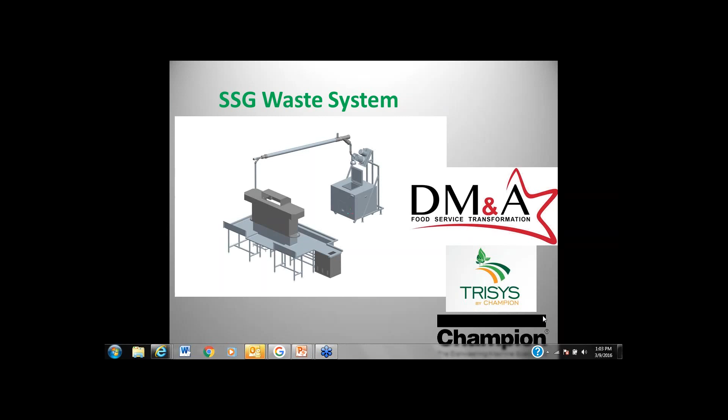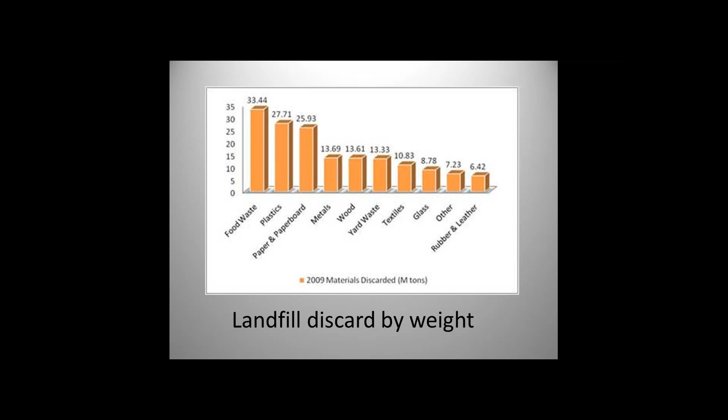Food waste, if you don't know, is the number one generated waste going into landfills today. In 1995, 14 million tons were generated, with only 3.5% recycled. As recent as 2010, that's doubled, and less of that product has been recycled. If you look at landfill discard by weight, food waste is the number one product going into our landfills today. Plastics, paper, metal, yard waste, those fill in the rest.

If you were to take all the food waste generated in the U.S. on a daily basis, it would fill the Rose Bowl to the brim. That's a lot of waste going into our landfills each day. All that waste has to be hauled off and processed, and it's a high cost to your operations. It's become a high priority in municipalities across the country as well as certain states.

Massachusetts in 2014 banned commercial operations from putting food waste into landfills, and the law basically states if you generate a ton of food waste or more per week, you have to repurpose that waste either through donations as usable food, or it can be composted or sent to biogas, but it has to be diverted away from landfill. Other states that come on board with similar legislation are Vermont, Oregon, Connecticut, Washington, and California.

The California initiative just started this year and will start next month in April with an initial 15% reduction mandate, and that will grow every year until we have a total elimination of that tonnage into the landfills in California.

Hey, Tom. Yes. You know, it's an interesting topic we have today. That's why we're doing it, because of the pressing need in America between water reduction issues with droughts and the impact that the waste has in our community, and we're all trying to be green. Now, I kind of wonder, many of our friends and clients out there have initiatives at their hospitals to address the green initiatives, and green certainly would be part of the food waste process. I hope we'll have some ideas later on to discuss about how to help these organizations achieve these goals.

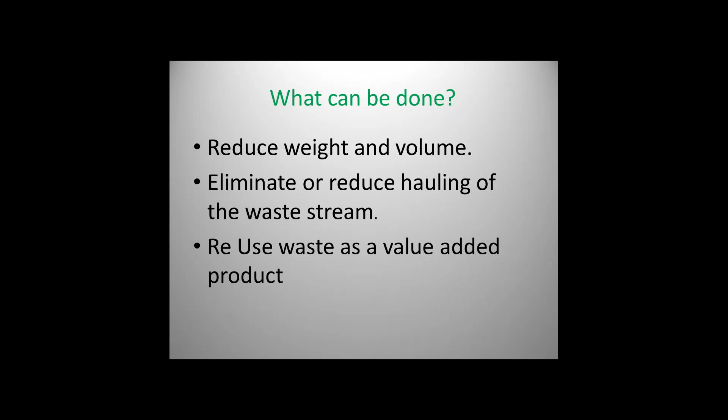Moving forward, the things we can do are first reduce the weight and volume of the waste going out. If you can eliminate or reduce the hauling of the waste stream, that saves your operation money. Or we can reuse the waste and produce value-added products for the market.

Here's a brief overview of something going on in St. Louis. Again, if your audio doesn't come through, work with me and I'll recap it at the end.

More companies are trying to go green, and that includes food recycling. The idea is to keep as much food as possible out of landfills, and this will show you how it works. The program accommodates businesses that prepare, serve, sell, and manufacture food.

For this story, we're starting in one of the cafeterias at Washington University. For years, we've been told to clean your plate, but even if we do, there's typically something like a banana peel left behind. At this location, you see about 8,000 people a day, so imagine the eggshells and other waste that has to be discarded. The good news is that no longer goes into a landfill.

It's garbled on my end as well, and I've got a few folks dropping questions saying they're also having garbled audio. Why don't you just walk us through what we're seeing, and we'll turn the volume down.

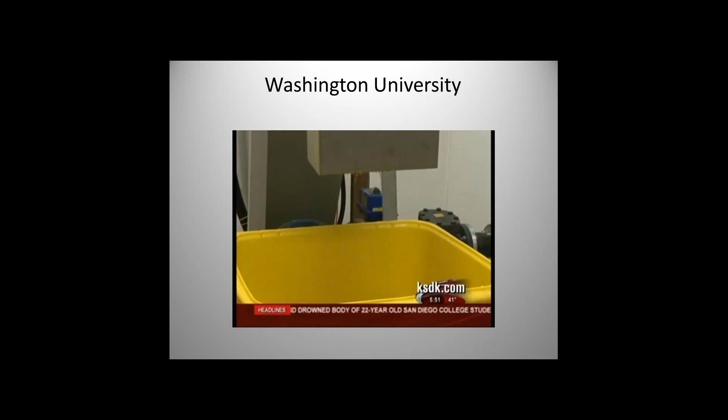So what we're seeing here is the dish room where they're processing food waste through a pulper. Then this food waste is being hauled off to the St. Louis composting facility.

It goes to the facility in wet form, and they immediately turn it into compost, forming windrows. About six weeks later, that food waste is turned directly into compost.

Washington University then takes that compost back from this composting facility and uses it on their grounds for landscaping operations. So they're taking product that would normally go to the landfill and bringing it back full circle, kind of like a farm-to-table, table-to-farm application.

That's really the nuts and bolts of what's going on here. Many of your municipalities will have composting facilities out there, and if you have that resource, this is a good way to use your food waste instead of landfilling it.

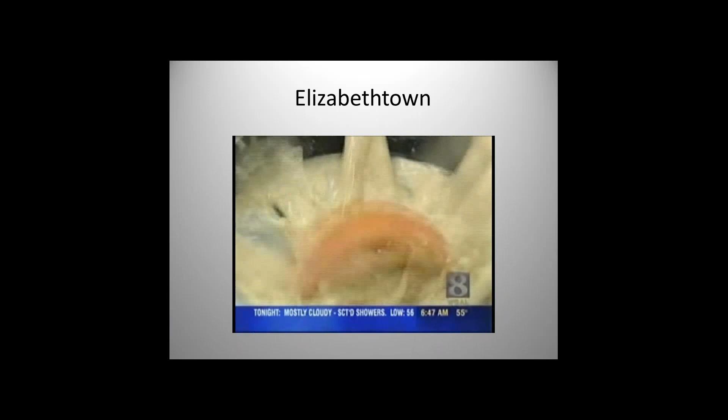Tom, what about the water? They're taking the food out of the mix, but are they reusing the water? Yeah, that water gets very milky and dirty—it's concentrated with food particles and fats, oils, and grease. They keep a closed loop on this, so that water fills into a tank and isn't sewered. It's collected at the end of each day into barrels, and those barrels are also added to the mix at the biogas plant.

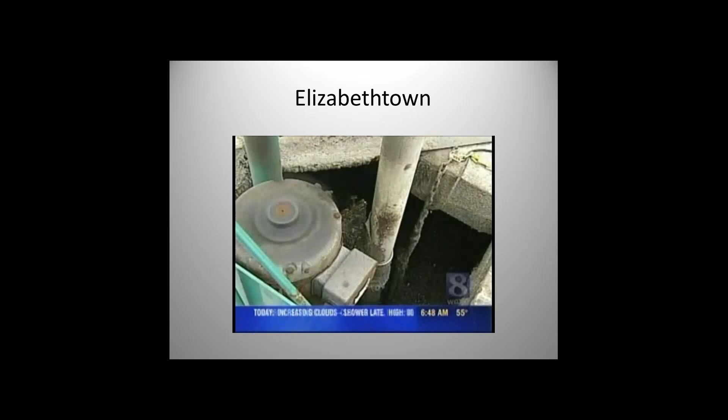That's pretty typical of what you see. Biogas plants are the big digesters that produce methane. The methane's burned off into electric generators, so it's a win-win for all people involved here.

But what do we do right now? What are our options with food waste? Well, obviously we can do the simple thing and throw it in the trash. Disposers are out there, but certain municipalities and areas of the country are having issues with disposers, mostly due to water use. Disposers can use anywhere from 7 to 14 gallons of fresh water a minute. Collectors are a means of keeping food waste out of the sewer lines, but they still use a fair amount of water.

So we're going to move forward with the latest, greatest product offering out there, and that's our slow-speed grinding system. I'm focusing on the pulper as its most current counterpart, in that we've been doing pulping for a long time and there are some benefits to it. We grind up the waste and reduce the volume by about 85%. We can take the water content out by about 20%. We recycle trough water, and it can handle all kinds of waste material.

They can be standalone, or they can be remoted where it separates the solids from the water at a remote location. They use less water than things like disposers and collectors, down to anywhere from 2 to 4 gallons a minute, so they can use a lot less water.

But if you talk to people who own them, we get feedback a lot that they're very loud. They have a high amount of wear and tear and maintenance required. They're expensive to install when you do remote locations. Very high maintenance level, heavy cleaning is necessary to keep them from stinking up the operation. You've got to manage waste odor by adding chemical. The KWs, because of the high-speed motors, tend to use a lot of energy as well.

And if you're not going to digest, you concentrate a lot of that food soil in the recycled water, and some municipalities don't like that. So what could we do?

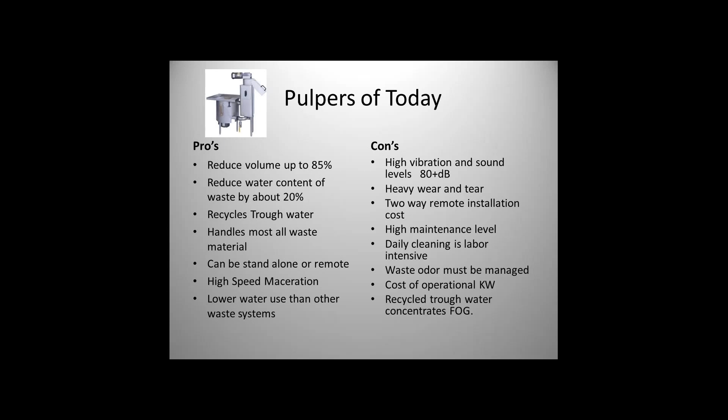Well, we come up with a product that reduces the noise level by 70%. We reduce the installation cost by about 75%. It's no extra footprint, lower maintenance item. It'll produce or process the same volumes that we have in traditional pulpers. The water use can be equal to or better, which I'll explain shortly. They're easy to clean, you don't have any odor, and we can take more water weight out of the end product.

Again, it sounds too good to be true. We're dropping power requirements by 60%, and we're using tested, reliable technology. This is just a repurposing of technology that's been out in the market for 40+ years.

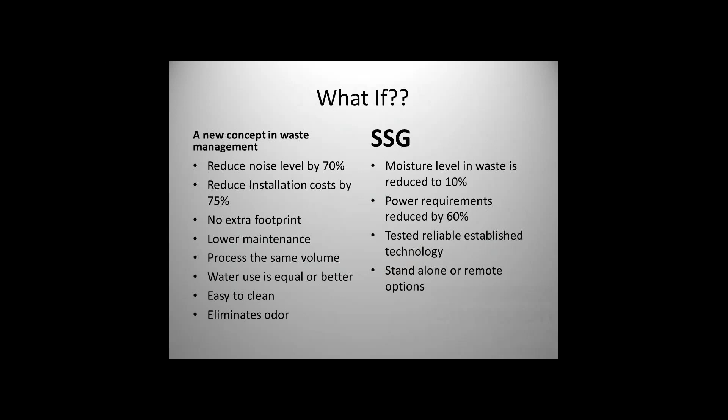So what we have is our slow-speed grinding, and what you see here illustrated is a remote system. What does it do? We have a slow-speed grinder, which grinds up the food waste, similar to that of pulping. And then we also have a slurry tank and a transfer pump that takes that slurry of wastewater and food over to a centrifuge. That centrifuge spins out the water from the solids, and then it drops the solids into whatever vessel we choose. In this case, we're going to drop the solids into a food waste dehydrator.

But that food waste could go directly into just a simple composting bin. It could go directly, if you had to, into a waste container, remoted. We could put it into a digester. There's certain commercial digesters on the market too that you can digest on site. So you have a lot of options of what you do with it at the end.

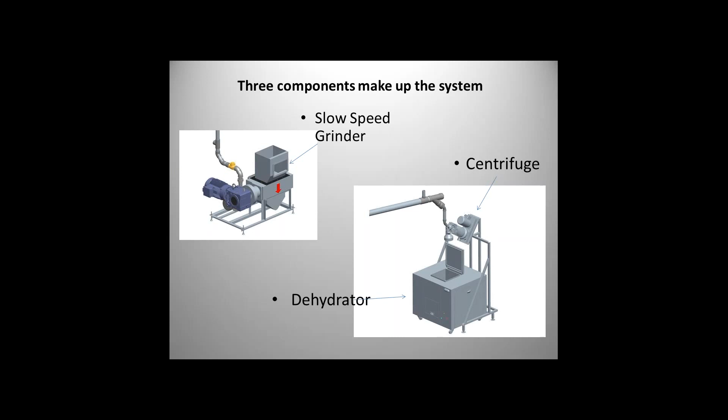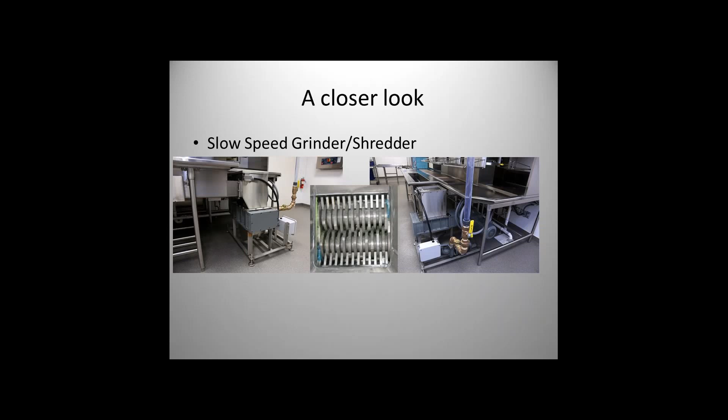This is what the shredder grinder looks like from the top. If you can kind of compare it to a paper shredder on steroids, that's what it does. It'll grind about anything you put into it. I haven't seen it not handle anything. So you've got to know if it's going to go in, it's going to get cut up. This is kind of, again, a picture of what an actual grinder looks like.

And then the next slide I'm going to show you, and the reason I show you this slide is to show you the capabilities of this grinder. What you're going to see here is a larger version in size, but it's the same mechanism that we use on our food one. It's just because we're using food, we don't use as wide as a unit.

If I can get this to play right. Excuse me, I'm trying to turn the volume down. Yeah, volume is not necessary. It's plain, clearly to the eye, you see what's going on. Clearly something for the eyes to see.

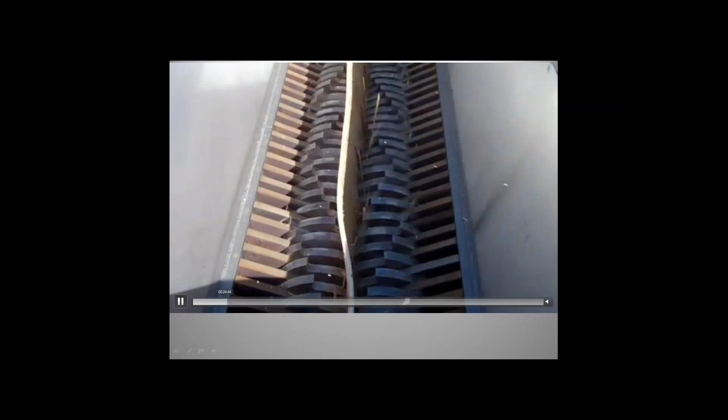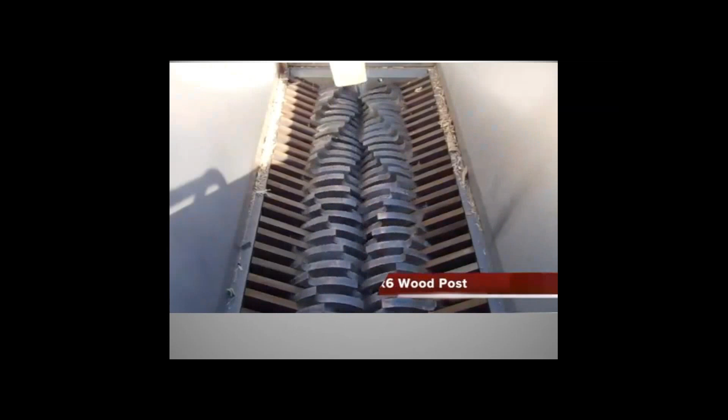We actually will use a 13-tooth cutter. This is a 7-tooth cutter because we want to have a finer grind on our food waste, so it's easier to manage. But you see that this thing can handle, it's a very robust grinding mechanism.

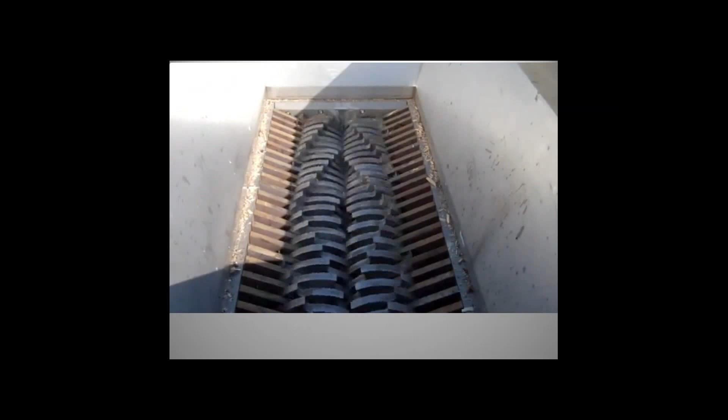And this technology has been used for 40 years. We use it in wastewater sewer treatment plants. It's used in the recycling industry when they're trying to shred and separate metals and plastics. The automobile recycling industry uses things like this to crush and shred cars and tires and all kinds of things.

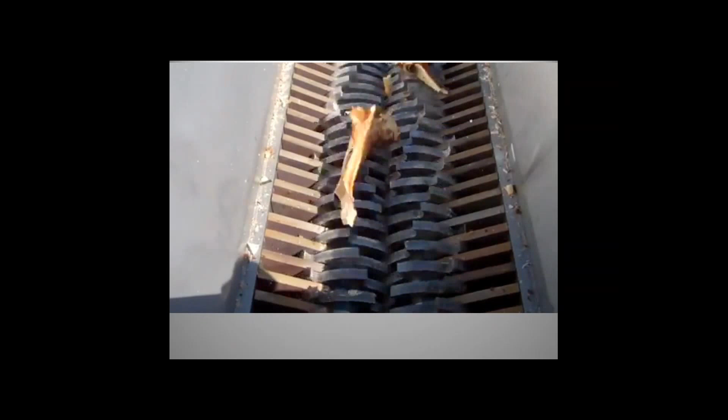It's very stable. And the nice thing that we found is, because we talked about reliability and maintenance, it's so overbuilt for these larger applications that food waste is really nothing for this thing to handle. So there's not a big need to sharpen and hone blades or a lot of greasing and things like that involved.

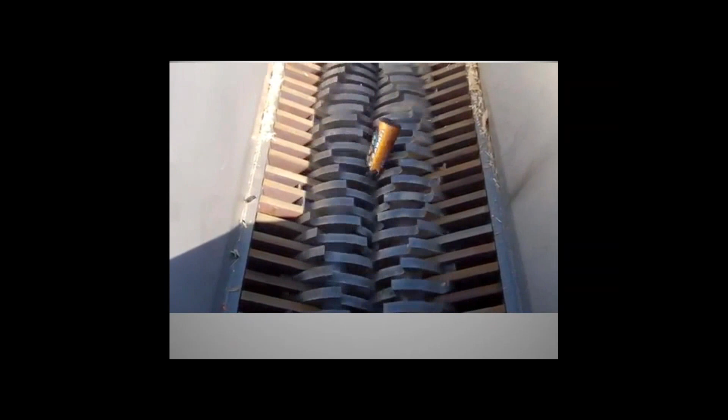We got a question here from Alabama. The person says historically we had difficulty grinding and shredding plastics, such as utensils, wraps, and so forth. Has the grinding system that we're looking at now, only in a smaller form, solved that?

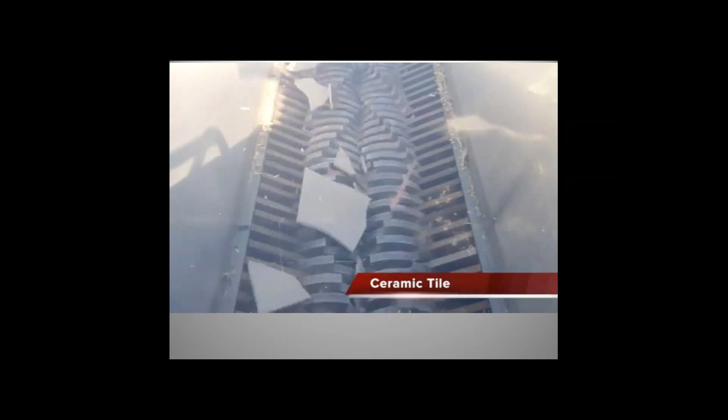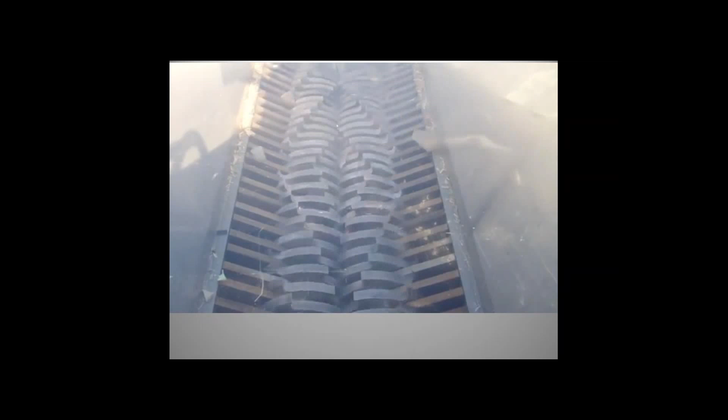Yeah, you mean the shredding of pliable plastics that we see in pulping? This thing will grind them right up, so we don't have to worry about that. Again, when you're dealing with plastics, we don't care what you put into it. It's really what you want to have come out of it that you're going to need to manage, based on what you're going to do with the waste at the end. But as far as plastics go, this thing's no problem.

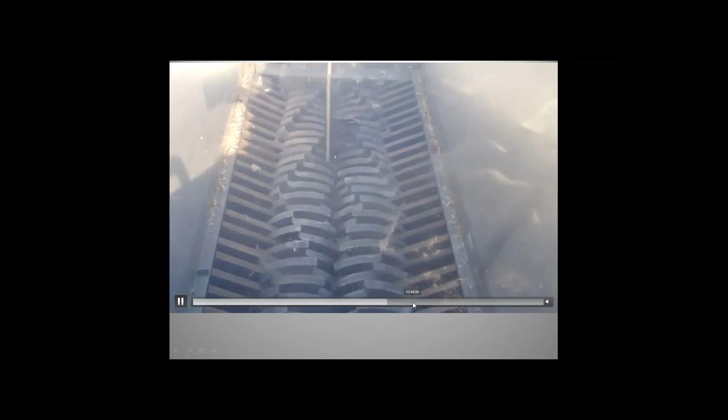Got it. I'm going to fast forward this a little bit to some more robust items. There's a concrete paver. So we've seen baseball bats, 2x4s, plywood, golf balls. Right, I think I have one here. There's a pallet.

There's a tire. So if you want to talk about plastics, that's kind of what you would see with plastics as well, just that type of grinding. So again, very robust. But even though it's very robust, it doesn't hardly make any noise.

A pulper in operation is going to go about 80 to 85 decibels. This thing runs at 60 decibels. It could be running in the background and you wouldn't hear it while I'm doing this conversation.

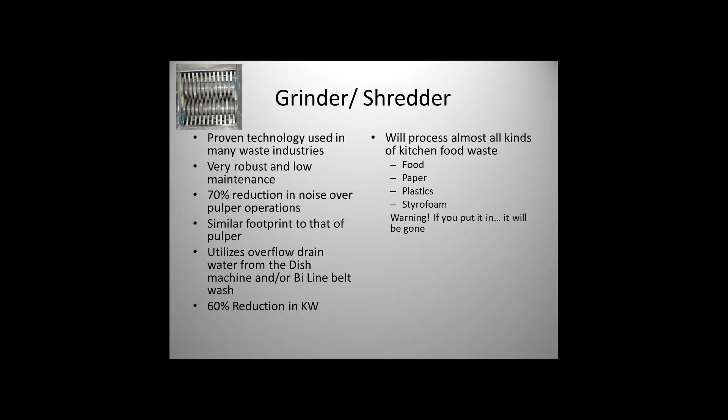Hi Tom, we got a question from California. What's the cost comparison between a pulper and a slow-speed grinder? This thing is actually priced about equal with pulping systems. So yeah, we like the fact that we're able to manufacture this at a competitive price as well, with all the benefits that were listed.

Exactly. Now you saw it grinding all those things up, and things can get in there that you don't want, namely silverware. So in the design and build, you'll see that box that says 'the grabber.' Those are some very strong magnets put on either side of the garbage trough, so that if you inadvertently throw silver flatware in there, it will pull it out of the waste stream and keep it from going into that grinder. Just one thing to keep you from throwing away things you don't want to throw away.

Tom, another question's come in. How challenging is it to clean and sanitize the piece or pieces of equipment? In other words, does the SSG come apart easily, or how do you clean it? Well, you really don't have to do much as far as cleaning. The grinder will work without water. The water we're using is just a transport method.

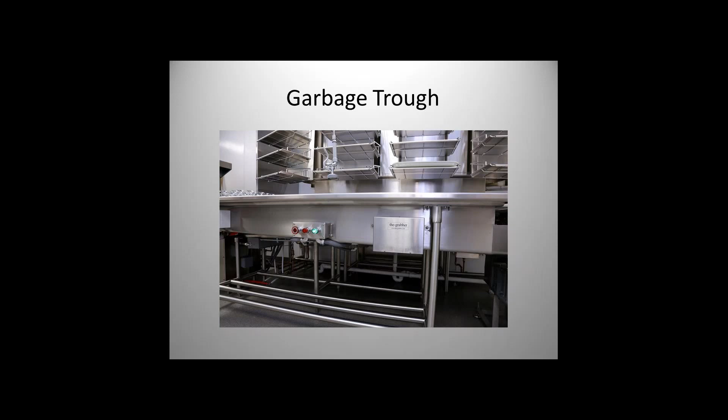You're already paying for the water, you might as well use as much of it as you can. So we put in a function where we can siphon off that gray water and go ahead and use it in the garbage as well. So it's a nice feature.

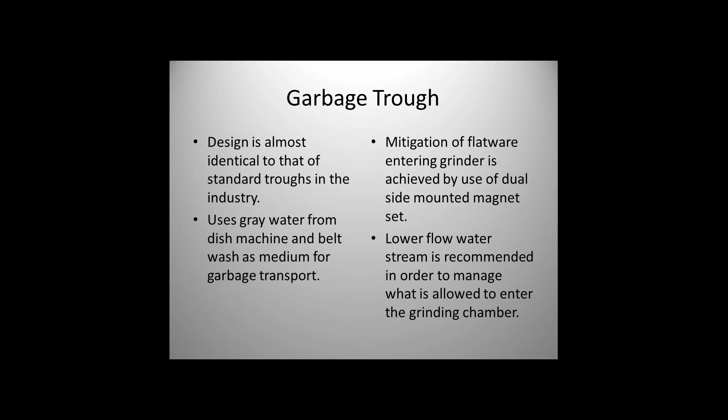Well, that's important in states having drought issues, like California, with mandated reductions. So that should positively contribute to their mandated water reduction goals, correct? Correct. I was talking to a gentleman in Texas recently, and he said the state had mandated that the whole dish room could not use more than 4 gallons of water per minute, including the warewashing and the waste system. So this is one of those things that can tie into that, because the dish machines now, the larger flight machines, are using just under a gallon a minute of water. So if you can keep that gallon a minute from the dish machine and use it in the waste system, you've got 3 gallons to play with. Excellent, which is a nice way to use it.

The second portion of it is a centrifuge. It's a much smaller footprint than you see in the typical water presses from the pulpers, and this is where we spin out the waste in the water. The unique thing here is that we have an internal screw that separates the solids from the liquid, and the screen that surrounds that screw spins as well, and by spinning it spins off the fine particulates that typically stick to your screen in the water press of a pulper, which is what ends up being the hard thing to clean and the hard thing to manage the odor and so forth.

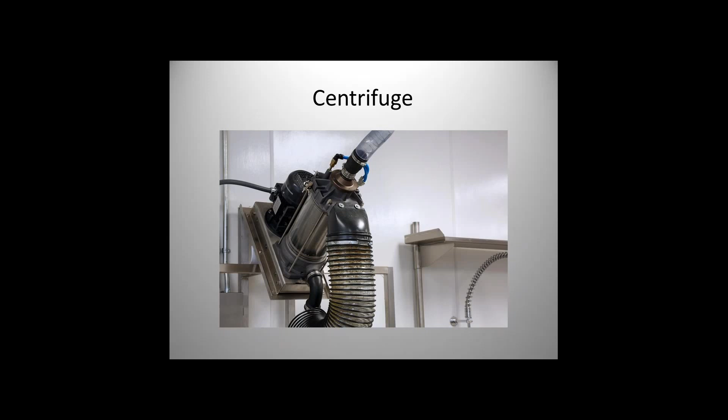It does remove more water content from the food, so when the food is being managed afterwards, it's lighter. And if we're going to be putting it into a dehydrator, we can reduce the dehydration time because we're removing more water from it on the front end. We install using PVC as opposed to copper, so there's a big reduction in installation costs. And again, it's a small footprint.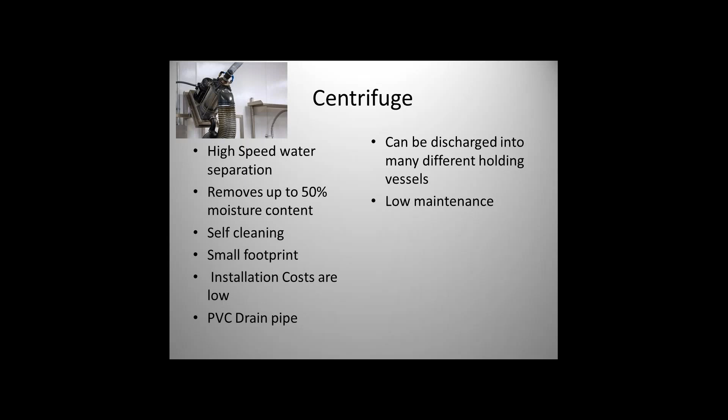This is the final portion of it. This is our dehydrator, and we can take that food waste, put it into this dehydrator, and once we dehydrate this food, we're going to reduce the weight and volume of that waste by 90%. That's a huge number when it comes to your payback of hauling this waste off and dealing with it.

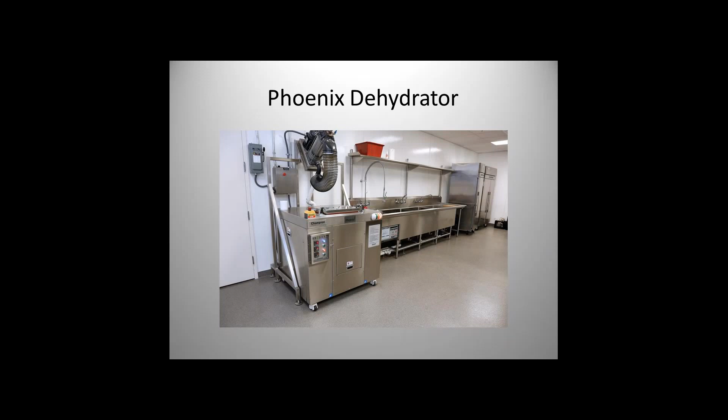You simply collect the waste on a daily basis. At night, close it up, turn the dehydrator on. In 8 to 10 hours, it comes out a dry product. It takes the moisture out of the food waste, and then you can store that food waste for extended periods of time in a stable format.

So you can collect a lot of this waste before it either needs to be hauled off, or whoever's going to then take it, be it to a composting facility or whatnot. You can hold a fair amount of this waste for up to about 90 days. It can be used as a compostable soil amendment, but you do not want to use this as a straight land-based application. You need to mix it with compost because it's very high in nitrates and nitrogen. You can't use it as a direct application.

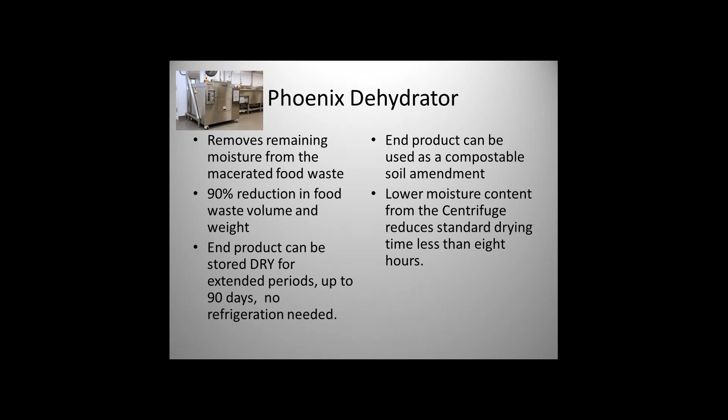One of the benefits is that it can be stored dry. A lot of folks doing something similar on their own are storing it in their refrigerators to keep down the incidence of infestation and smell. Yeah, absolutely, and that's one of the things people really like is no longer do you have to have a pulping room under refrigeration. You're not having to pay for the refrigeration KWs, and you free up space. So as long as you keep it tied off in a dry plastic bag, it stays very stable.

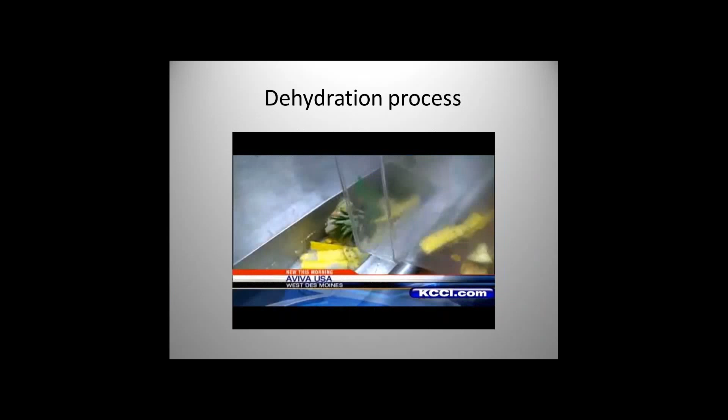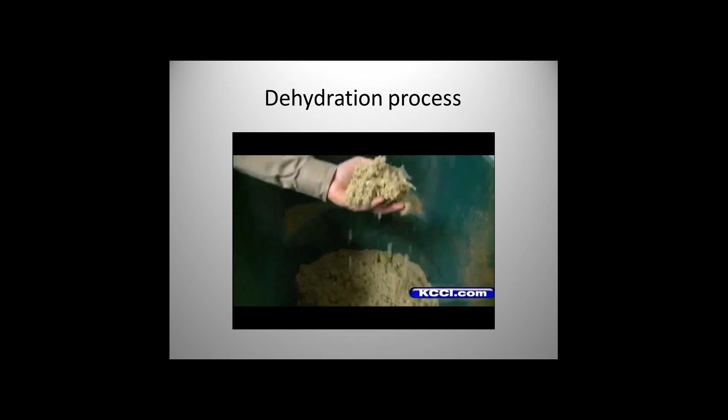Again, another news clip, this one from a B&I in Iowa, and you'll see what that dehydrated product looks like here shortly. In this application, you see her holding up those cups—those are biodegradable disposables, so if you go to that level of service, those can certainly go in. They're doing 3,000 meals a day, and that's 3 days worth of food waste you just saw in that tub. That's how finely dehydrated down that product can become.

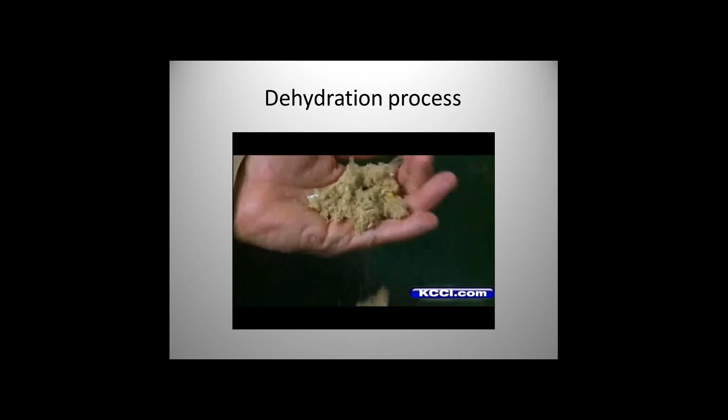It almost looks like the insulation you blow into your attic. Yeah, I don't know if I want to use it for that. The only problem you have with this is if you don't keep it dry and you let it get wet again, it's going to start to break down and stink. So you want to keep it stable depending on what you're going to do with it. But again, you don't have to worry about infestation and so forth—it really keeps the insects and vermin out of that. So that's what that product looks like.

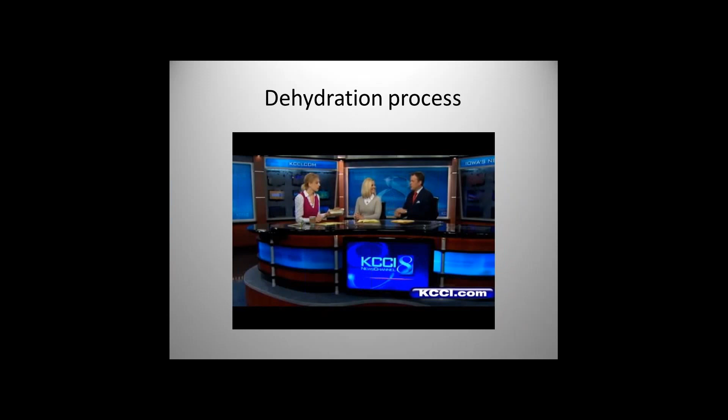Again, we were saying remote system or close-coupled. We can do a remote system where we put the centrifuge in another room or off on a dock or somewhere else in the operation. But we can also do what's called close-coupled, where the whole system is put together right there in your dish room. It's really up to you what space is available and resources that we have.

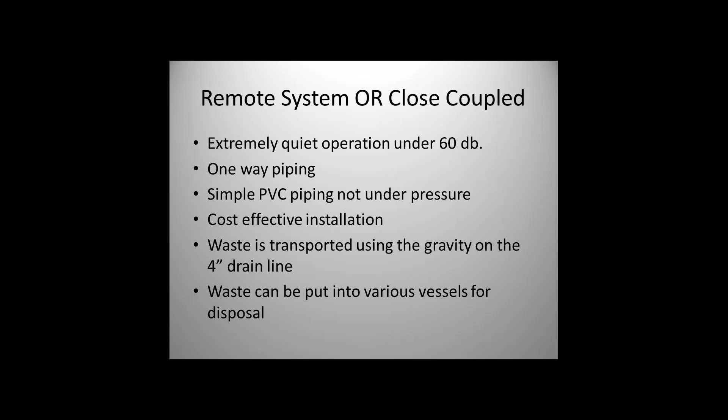This is an operation we were showing at a university that we installed last year. I'm going to turn this down, but I want to show you, as he's talking, the grounds guy, because we are able to take this, again, this is the food waste.

This really fell nicely into their green initiative. This is a self-operated operation where they take the dehydrated food waste, and on campus they have their own composting operation going on. So the grounds department comes and gets their food waste on a daily basis and mixes it with their compost. That's one day's worth of food waste, 3,000 meals a day after it's been dehydrated. You saw in that bag. Jeez, that's fairly impressive.

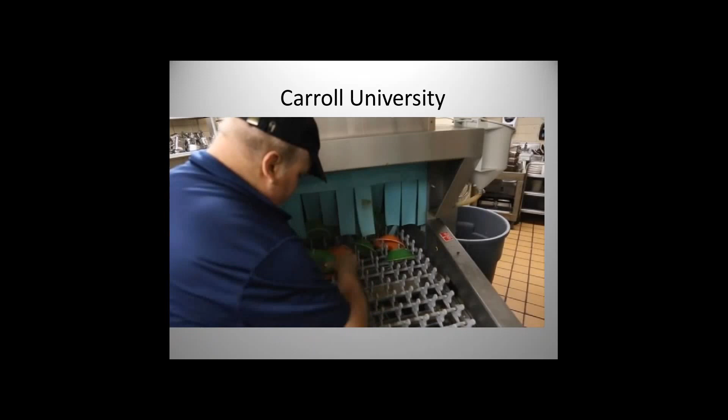That's really what I wanted to show you there, was that portion of it. This is an operation where the grinder is up on one floor, and we actually pipe the slurry down below them in a basement, and that's where they keep their dehydrator and their centrifuge. So we can move this to different floors and so forth if that becomes an issue.

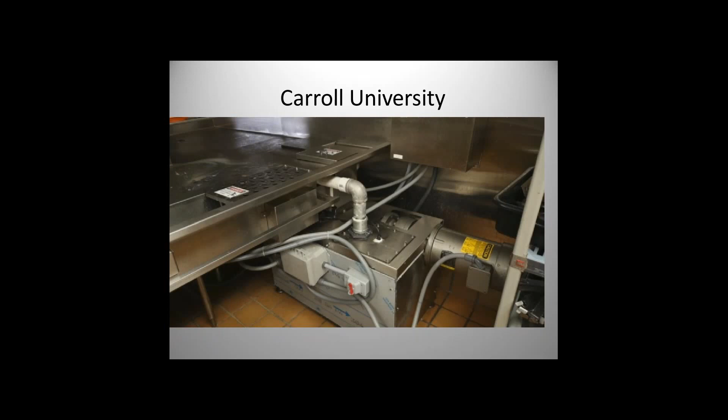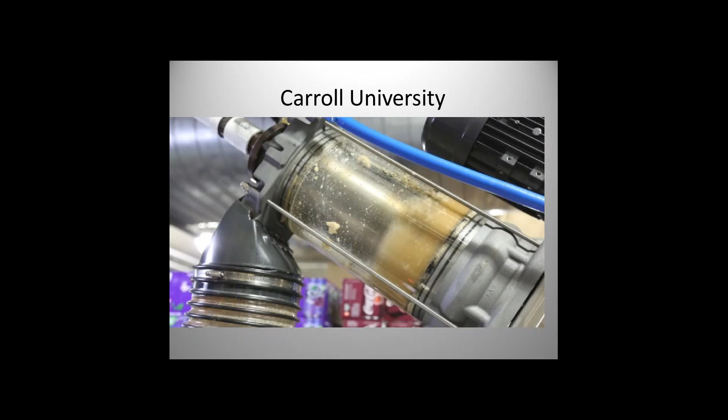That's the remote design you're referring to. So there's the grinder, and then again it's being piped downstairs to the centrifuge, and this is basically in one of their dry storage rooms down in the basement, where they keep the dehydrator. There you go, that's what it would look like.

In kind of closing, some of the things we would offer to you, if you're interested in this type of technology, we will send our representatives out to your operation. We'll do a full site survey, find out what you have to work with, what your goals are. We can then start looking for resources for output, be it biodigestion, composting, or just reducing landfill, and then come up with the right recommendations, size, placement, etc.

The other thing we can offer is this: we can get the information from you and give you a good return on investment based on what you're currently doing. A lot of that comes from reduction in waste hauling cost. We typically find you get about a 2 to 4 year payback on doing something like this in your operation.

Not to mention the ability to put on the docket that you have met the administrator or board's goal for green contribution. Well, that's what we're finding, and Bill and I had discussed this. I'm getting calls more and more every day from people saying our operation has a new green initiative, that we need to reduce X, Y, and Z, be it waste, water consumption, and so forth. So they're looking for answers, and there are now positions out there, sustainability executives, that are putting this through. So we'd like to think we have some solutions for you.

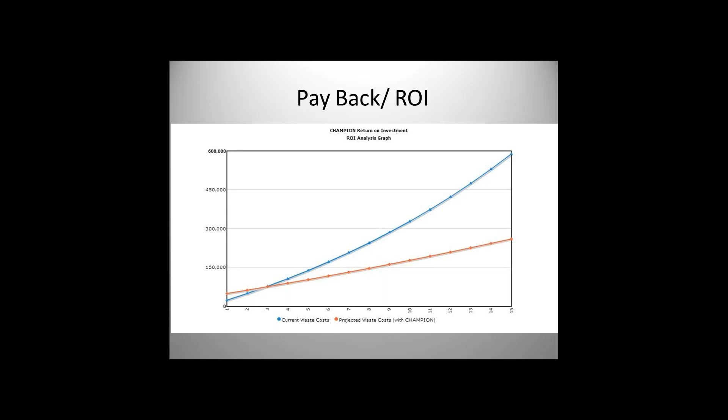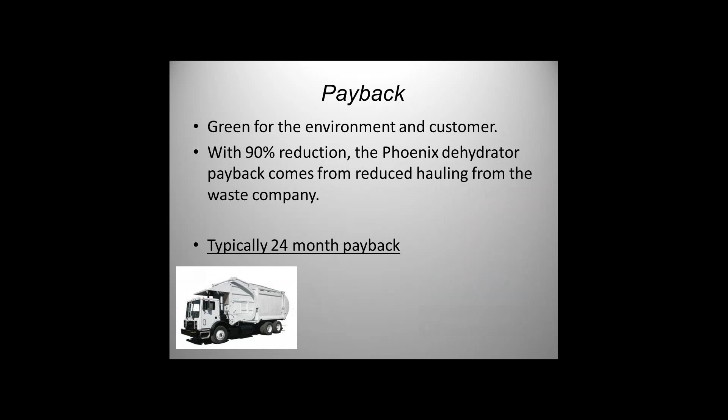And pretty much that's where we're at. We can reduce 90% of the waste, and the payback comes from hauling off in 24 to 48 months. That's about it. I really do thank you all for your time and your participation. I hope maybe you've learned something, and if you have questions, please fill them out there.

Tom, I think one thing that system would do is address the hospitals and organizations we deal with putting a lot of wet waste into a traditional 55-gallon garbage can, which someone then has to pick up and somehow dump into a trash bin. This could perhaps address some of the back strain and employee accidents that occur. It absolutely does. When you route these directly into the vessel that you're going to process further or dispose into, it reduces a lot of labor issues. And we're not just talking hourly wages, we're talking workman's comp issues, which are much more expensive in the long run. So we can address that as well.

If you run this right into a dehydrator, you're taking 200 pounds of waste and it's coming out 20 pounds. That alone can help mitigate a lot of the back strain and the work comp issues that people fight every day.